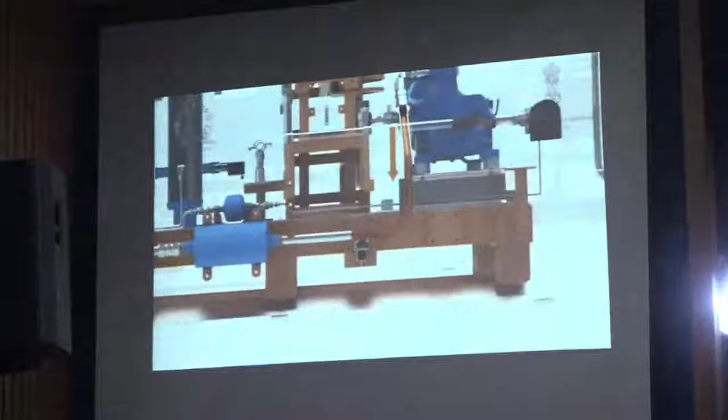Density and favorable transport properties of supercritical CO2 make the power block extremely compact and efficient compared to a conventional steam system. The cycle begins by compressing the CO2 from 75 bars to 120 bars.

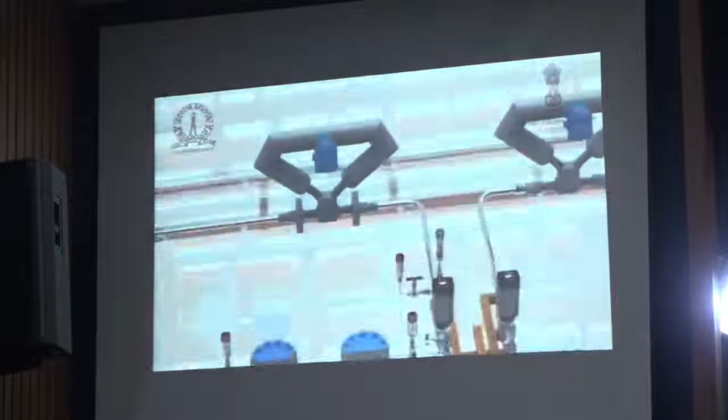The high-pressure CO2 is passed through a microchannel heat exchanger-based recuperator to recover heat from the high-temperature CO2 from turbine exhaust and heat the low-temperature CO2 from compressor discharge.

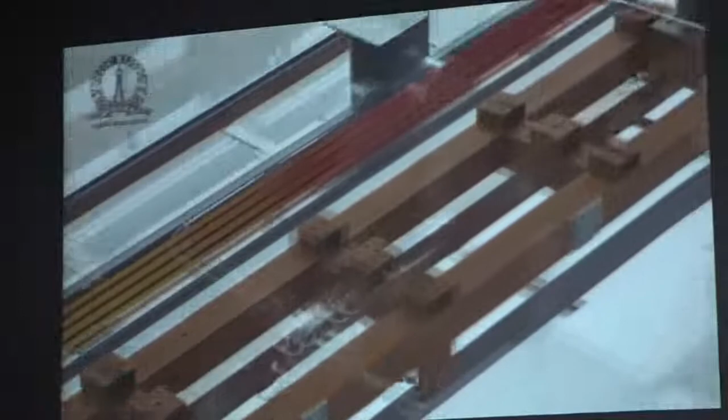The test loop employs a two-stage heating system to heat CO2 leaving the recuperator to 535 degrees Celsius. The first stage heater serves as a replacement for the recuperator during startup when recuperation is absent. In an actual installation, the second stage heater is replaced by a suitable heat source such as concentrated solar power or a waste heat source such as gas turbine exhaust heat.

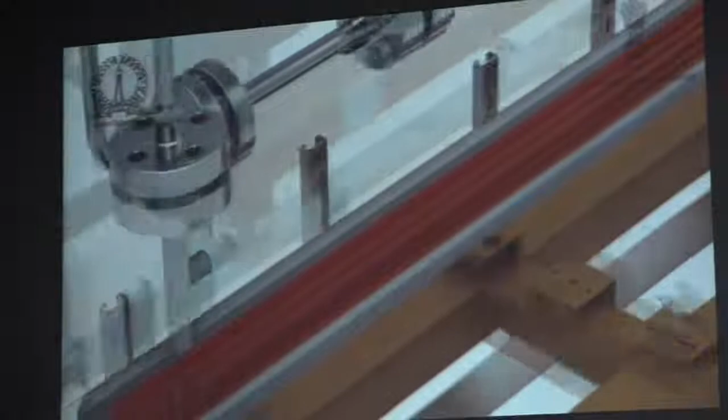During the process of heat addition, high-pressure CO2 undergoes significant density change, thus significantly reducing the volumetric flow rates across the turbine and shrinking the size of turbomachinery. CO2 at 120 bars and 535 degrees Celsius enters the turbo generator to generate power.

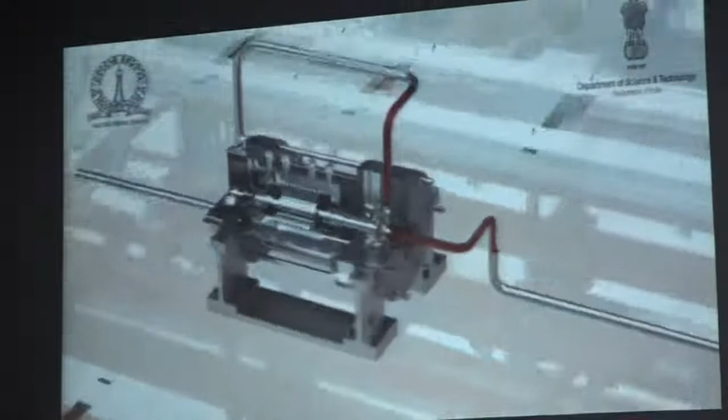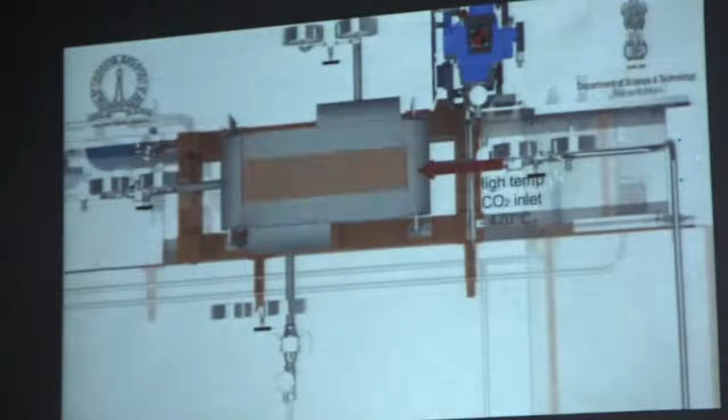The low-pressure, high-temperature CO2 passes through the recuperator before passing through a micro-channel-based gas cooler. Water is used as a cooling media in the gas cooler. The cold CO2 is routed back to the compressor suction, thus completing the cycle.

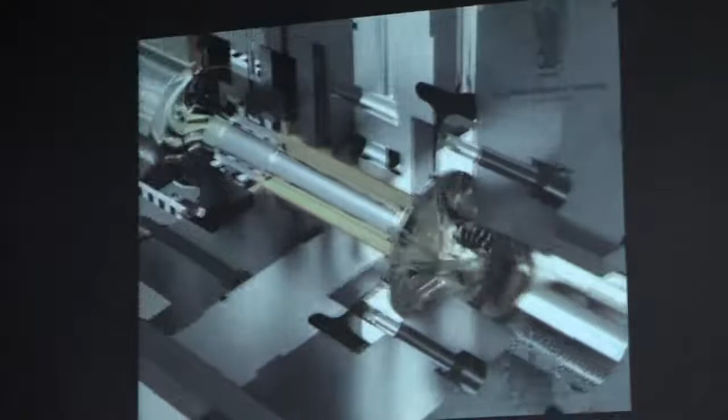The realization of SCO2 technology comes with a lot of hurdles. Small blade heights in turbomachinery pose key challenges in sealing and manufacturing. Very high operating speeds ranging from 40,000 to 150,000 RPM make it an engineering nightmare to realize the technology at small scales.

The group at Indian Institute of Science is addressing these issues by designing novel labyrinth seal arrangements to reduce the pressure and leakage, minimize the impeller thrust load, and increase bearing life.

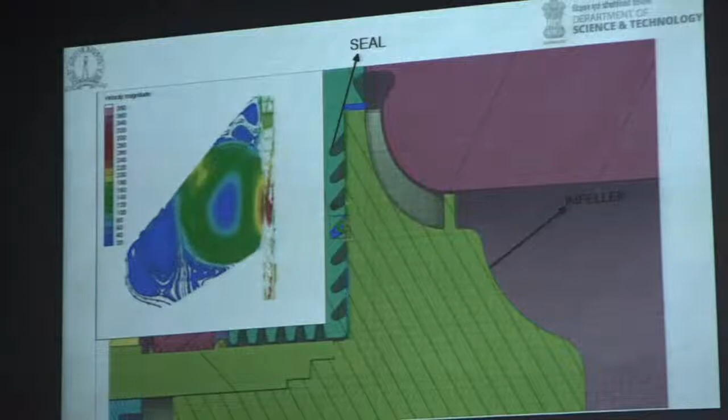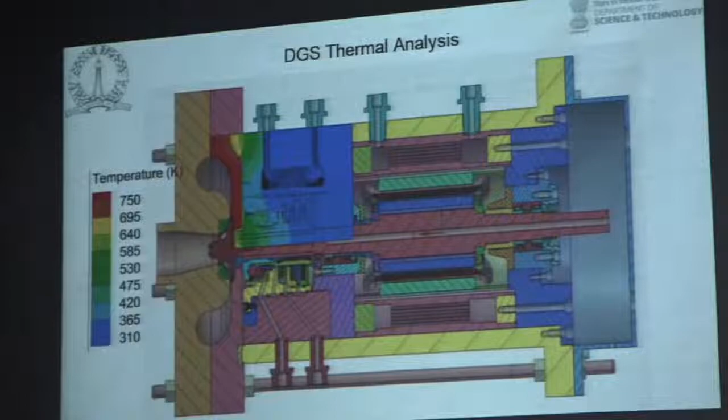The CO2 turbine employs a dry gas seal to seal the processed CO2 from leaking out. Numerous cooling arrangements have been analyzed to maintain the DGS temperature within specified operating limits.

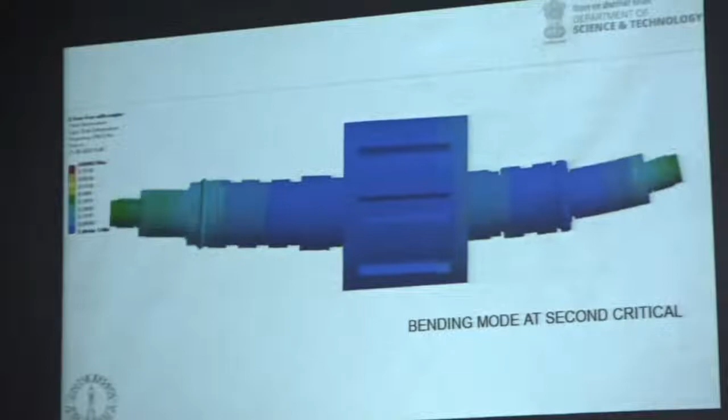Rotor dynamics and structural integrity of the shaft are critical aspects of high-speed machines. A number of rotor configurations have been simulated to optimize the shaft dimensions to mitigate operation near the critical speeds and ensure safety.

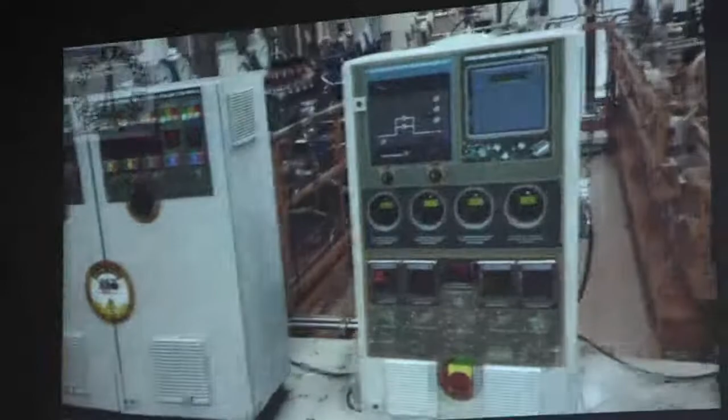The work is financially supported by the Department of Science and Technology, Government of India. Extensive technical interactions with Triveni Turbines Bangalore have significantly contributed to the development of the technology.